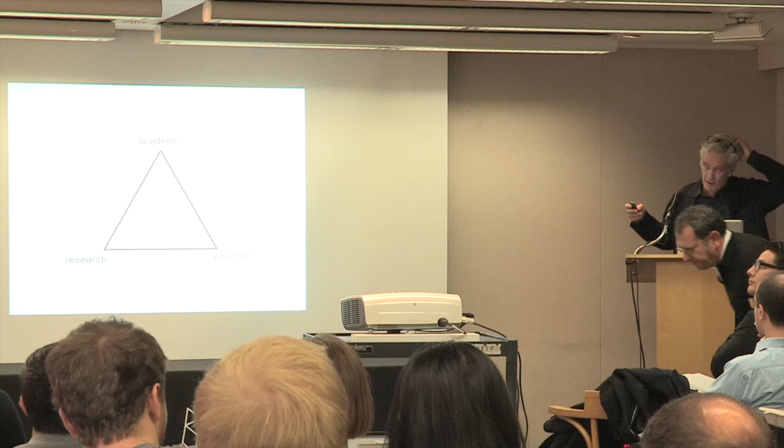I think, like many practices of our generation, working between a research project, an academic project, and the practice itself is fairly common, fairly clear in terms of how these work areas inform each other. This soundbite is really about our time at the GSD, the late 80s, early 90s, with Moneo, and this idea of physicality in architecture—that architecture is really a material practice, and it is the transformation of materials that leads to architectural idea or ideation.

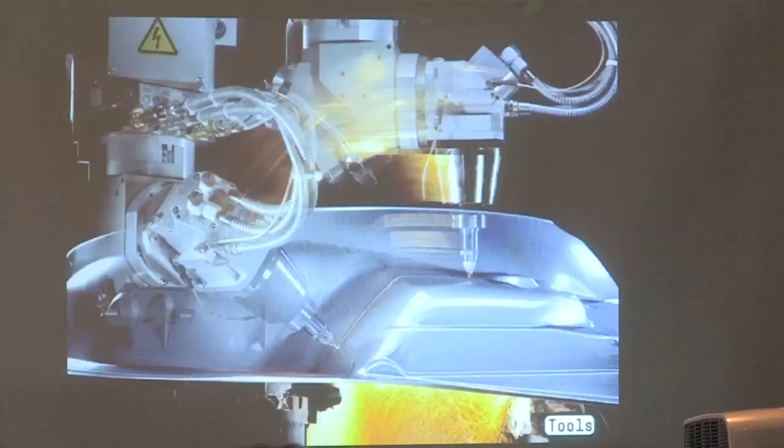So some of the things we've been doing—I'll do a quick forward before I focus on one project in more detail—this idea of tools, both digital and analog, in the practice. What are tools, what are emerging technologies, how can we use them in the practice, and how can that inform the making of architecture.

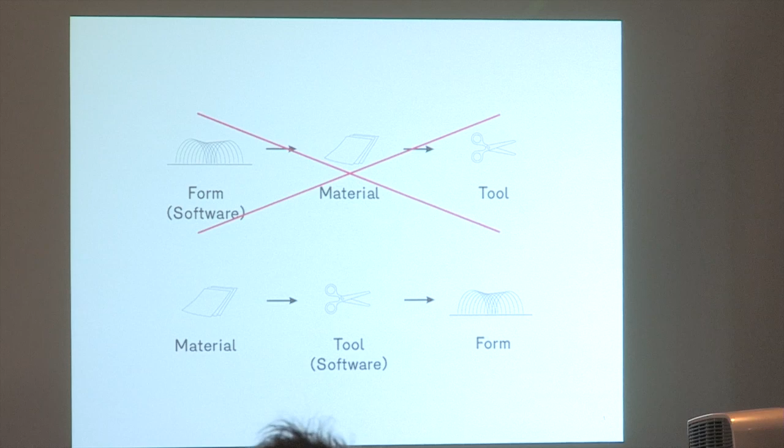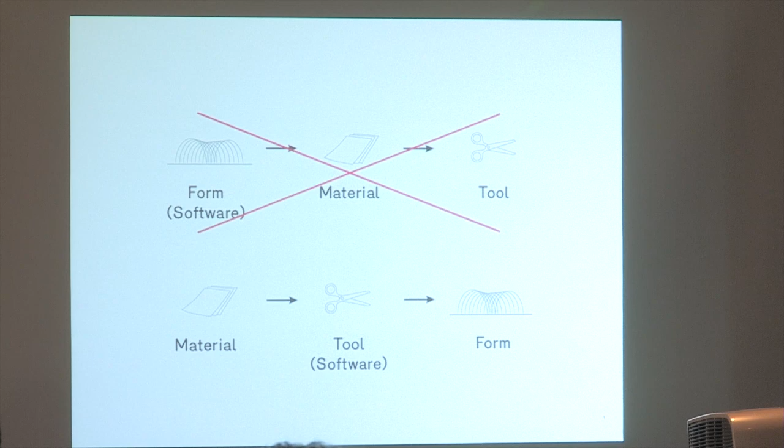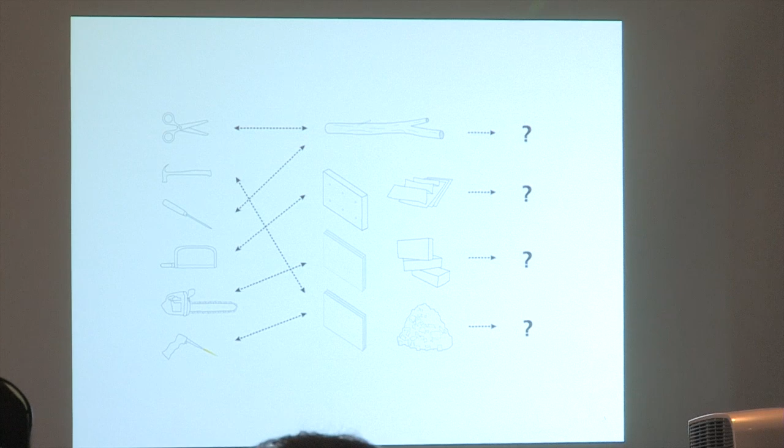When we were students, this was probably the kind of workflow we were contemplating—software was starting to emerge, and it would lead to materials and tooling. More recently, it works like this instead. What's interesting about that approach is that it allows the work to differentiate, allowing toolings and technologies to drive the work forward.

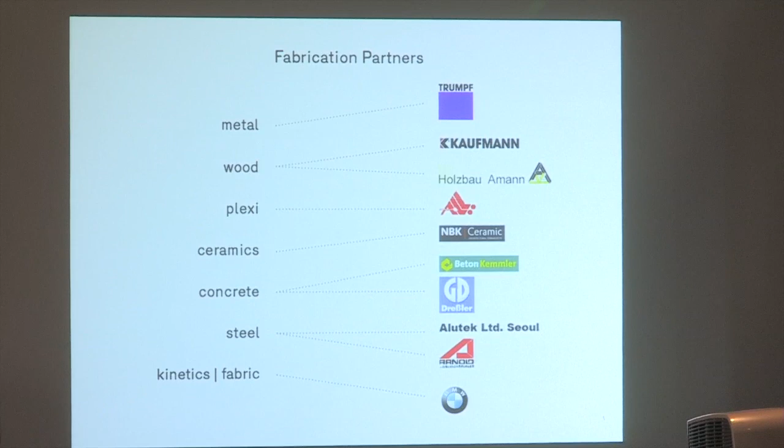This means we're constantly accumulating partners with different skill sets related to materials and their transformation, as a way for us to work with partners, becoming our own best experts in terms of how processes can happen. This also means working with engineers, as we'll be working with Jürg Conzett this week, in an upfront process where we work with engineers at the beginning in a workshop, understanding these things in a more integrated approach where engineering methods and architecture work together.

In order to do this, over the last 5-10 years, we developed this idea of an atlas of fabrication, where we started to produce our own building catalogs—not so much to document buildings per se, but to document processes, typically through activity, through action upon materials, through tooling, as a self-constructed project within the practice that we can add to.

When we initiated the first catalog—and I have a few of these floating around, so I can drop some with the school—it was complemented by an exhibition, first at the AA in London, then later an exhibition in Berlin.

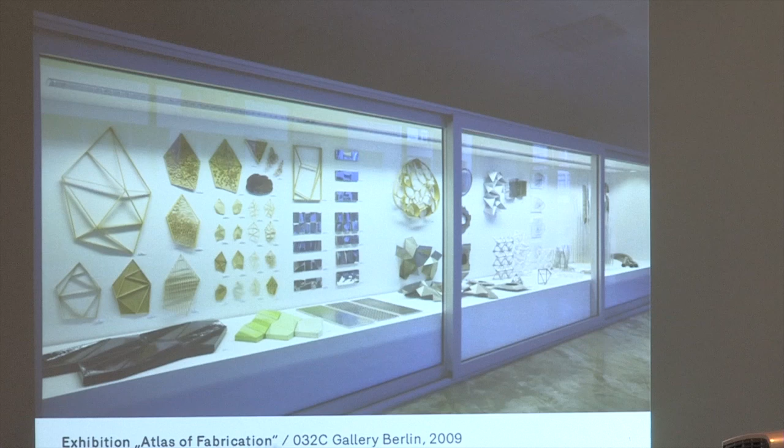This was a way, almost like a natural science museum, or thinking about the idea of an atlas, the way Gerhard Richter would—a kind of series of outtakes or outcuts that are in a not-yet-architecture position, latent to be used or instrumentalized for our building processes.

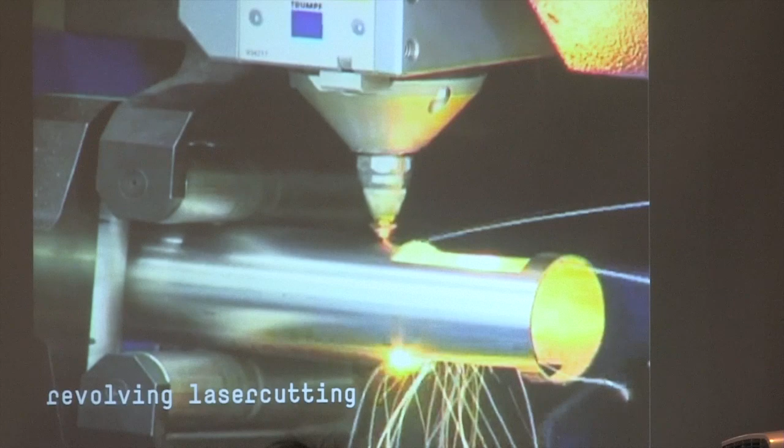At the same time, we began to research and document the capacities of different tools. Working with GSD students, many would go down to the factory sites, look at machines, look at tools, both digital and analog, in a very open-ended, experimental way.

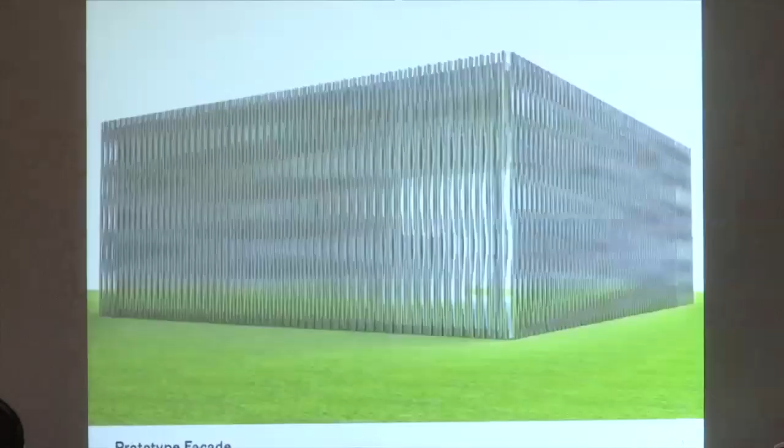In a very compressed timeline, those experiments led to a project at the scale of a prototype and installation, and further development of that idea as a kind of facade that could rotate—for performative ideas like sunscreening, and for the showroom in Sweden, to show the content inside and create an aesthetic effect, as a timeline between these things.

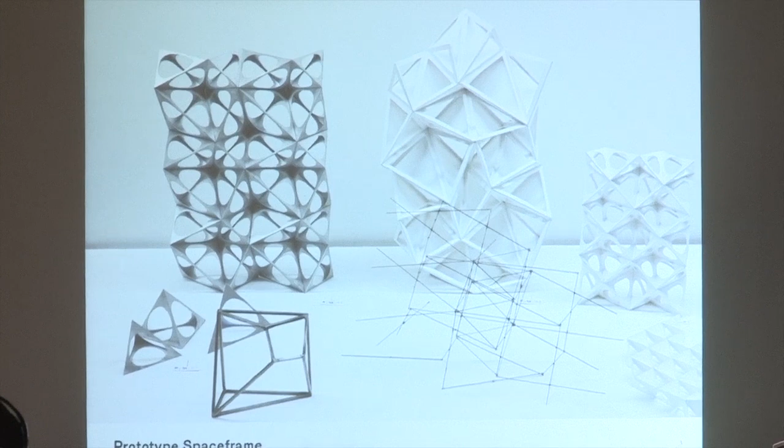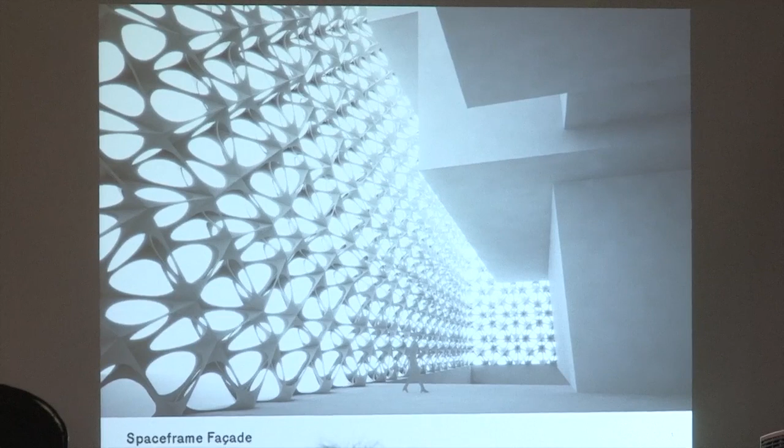Other research areas included space frames—studying those developed in the 60s and 70s, and looking for applications of these architectural elements, in this case as a facade for the Kunstmuseum for the Zurich competition a few years ago, including a studio we did here at the GSD with Chris Bangle, head of design at BMW at the time.

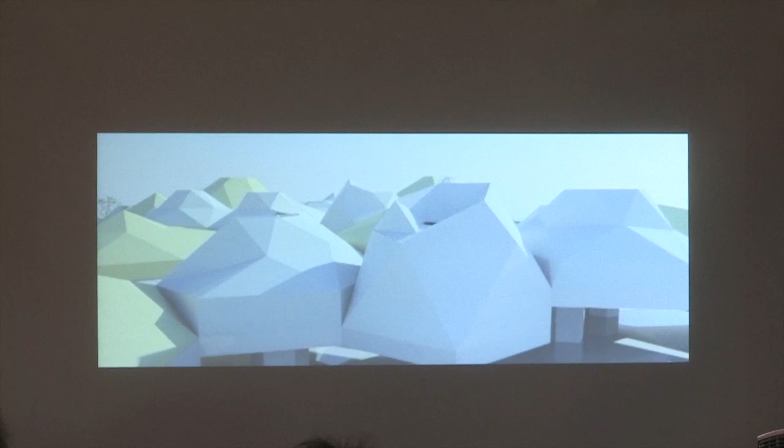This idea of looking at other disciplines, particularly in Germany, which is loaded with technology firms doing different things—in this case looking at Gina, an idea for a kinetic fabric skin for a car that can move and change, and rethinking or rebooting this idea for housing.

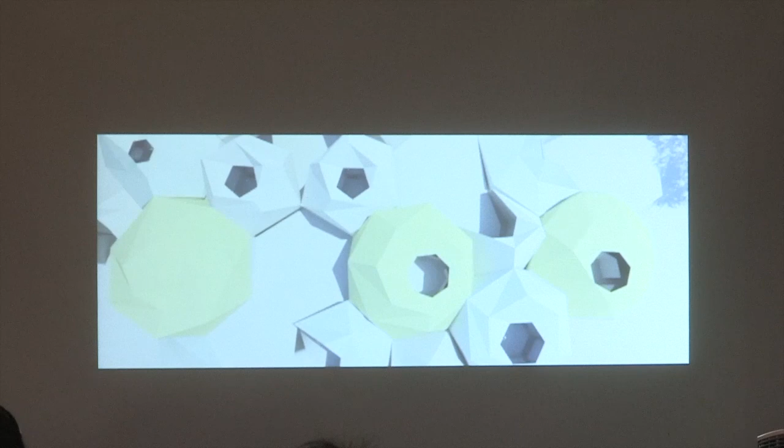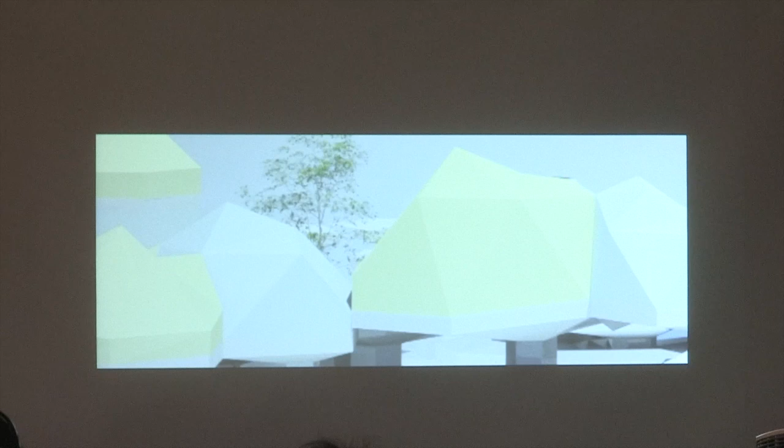This is a project from Nacho Galan for a housing development where the buildings can move, change, respatialize, and reorient to sun orientation—using this technology from the auto industry and revisiting that project at the scale of housing.

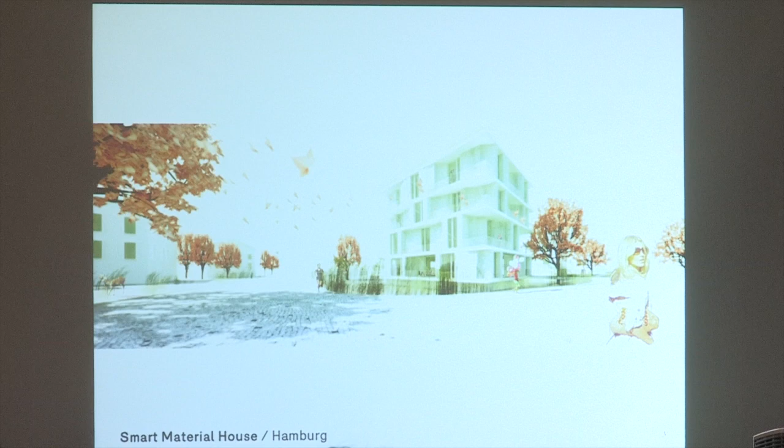Berlin famously had an IBA in the 80s. But the question of this particular IBA was smart materials—what are smart materials today, how could they inform an architectural project, and how could that inform this idea of a project here in Wilhelmsburg.

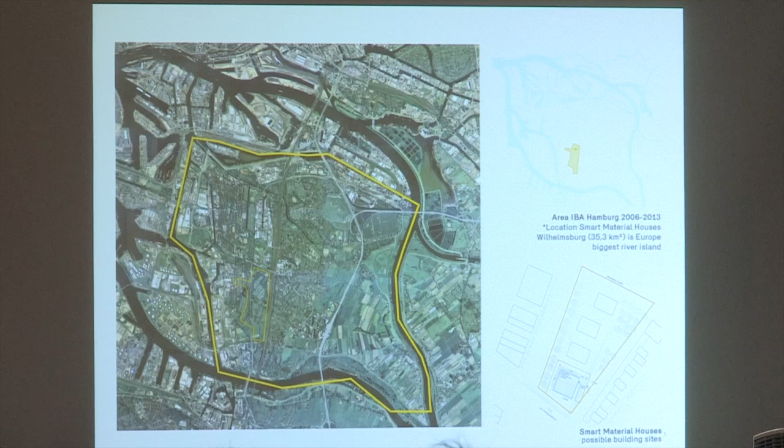This is Hamburg's Hafen City, where the Herzog de Meuron project is. But this is a kind of sketchy industrial part of the city where we were asked to look at a site on the corner to test this idea for about 8 or 10 flats of apartments.

To start this project, we began shopping for materials at the outset to see how that might lead to the building project. We worked with our engineers, including Mike Schlaich, an expert on Infralight concrete, which we ended up using, and Matthias Schuler from Transsolar, who has also been teaching here at the GSD.

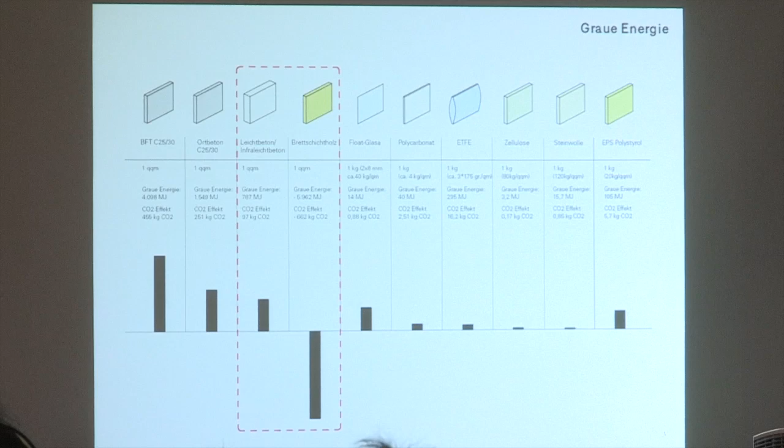Looking at CO2 impact, we ended up selecting two materials that at the outset seemed strange to have together: Infralight concrete, which is self-insulated, combined with timber, which is good in tension for the floor plates.

This material is one-third the weight of regular concrete. It's insulated either with recycled glass or clay, so it's self-insulated—the thicker it is, the better—and it can be combined with timber for the decking of the project.

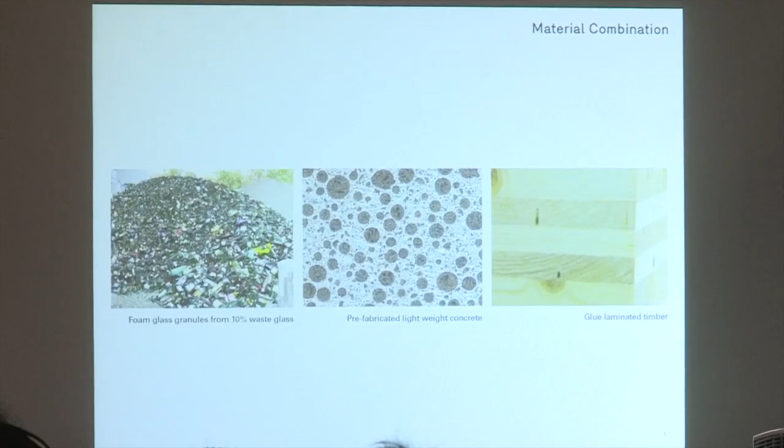At the same time, we were quite curious about the history of prefabricated concrete in places like Germany. This is Khrushchev in 1957, inspecting a model showing the Plattenbau construction, which would work on these kinds of rail lines.

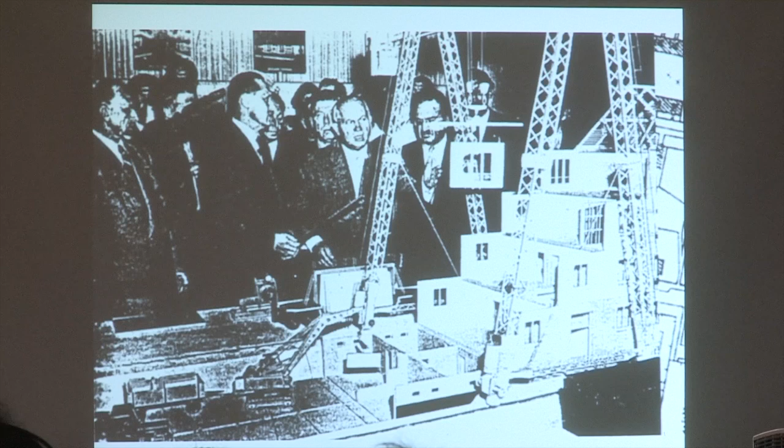The Plattenbau, this plate building, populates entire Eastern European cities and countries as a way of economical, cheap housing. At the same time, it could differentiate. You could have very different sorts of programs and facade systems within this idea, including the idea of arts programs, which were also embedded into the project.

At the same time, this is a conversation with Matthias, about what concrete is and how one could exploit the plastic potential of the material, the idea of shaping a material that's entirely different from others. So some of our first sketch projects were thinking about a smart material, a self-insulated concrete that could pin together to hold a wood construction together. The idea of a wood high-rise in Europe is something not very far away, particularly in countries like Switzerland, Germany, Austria, sketches and projects like this.

This was a project for a kind of box beam space. This is also, I think, a project inspired by some of Jörg's work, where that space can be occupied, it can be programmed, and through this self-stabilizing history of wall making, this box beam could span up to 20, 30, 40 meters.

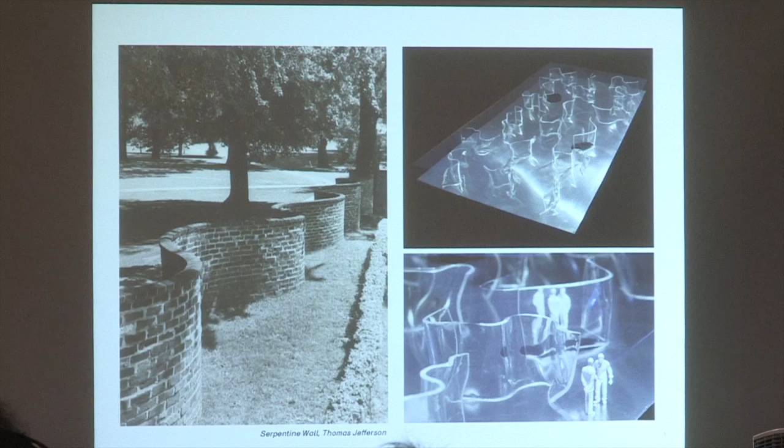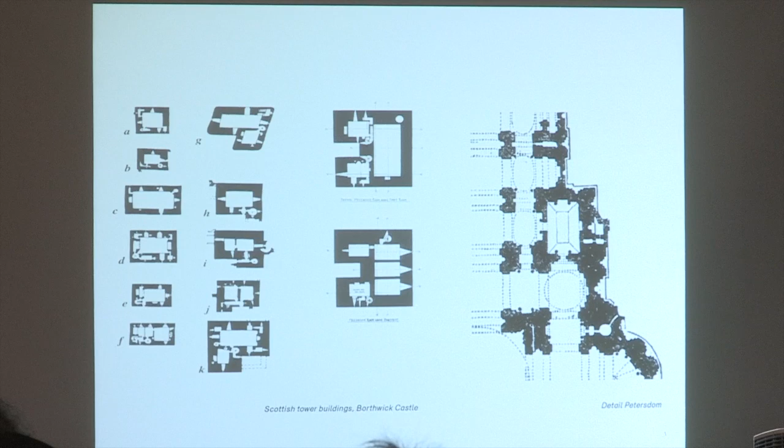At the same time, with this particular material, we returned to the idea of poché. Until recently, high-tech was always about lightness, about steel, about glass, about combining. And here was a material that actually benefited, or profited, through its thickness, through this idea of poché. So in a way, that was also the chance to revisit a kind of historical project.

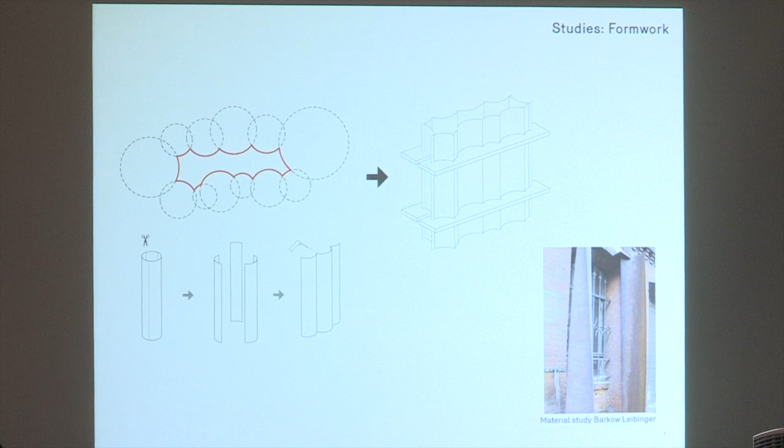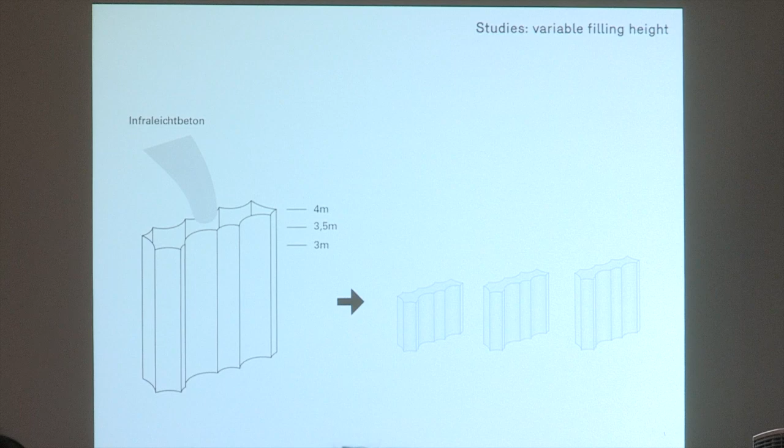Through our earlier fabrication research, we know how to do formwork, so we were pretty confident in terms of doing more complicated formwork. The idea of prefabrication, which usually wants to be about modularization, making the same thing over and over again - we realized we could pour things at different heights. You could take elements, flip them upside down, make a different kind of element, and started to create a kind of form language, almost a kind of alphabet of different building elements which we could combine.

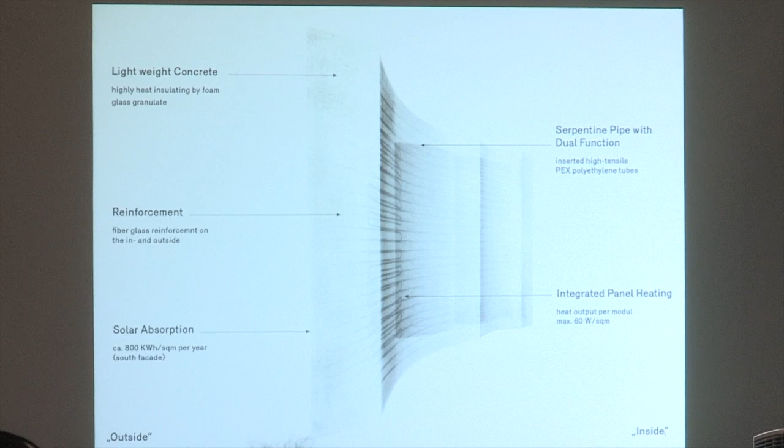In the end, we selected this element, again for a combination of performative potential as well as a kind of formal one. The idea that the shape could be self-stabilizing, self-standing, it wouldn't require any kind of scaffolding to put it up.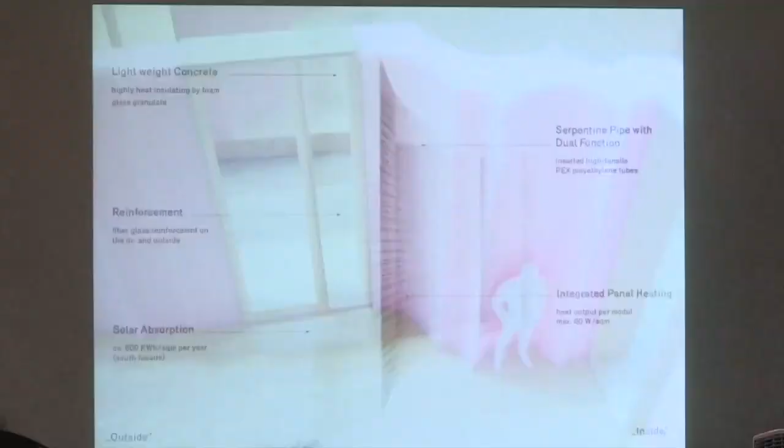All the heating and cooling can be embedded in this element, which is about 60 centimeters thick. It can use mass radiant heating from solar collection, but at the same time have a kind of spatial effect both on the interior and exterior of these spaces, and the scaling of it was important too. So for us it was important, we knew this is going to be a kind of domestic space, so sizing it, combining it with deep wood windows...

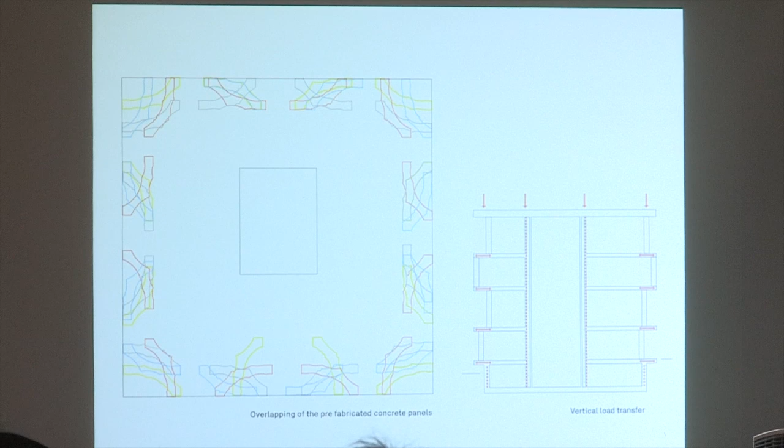...and then started to produce this idea of a stacking, which in a way works like a house of cards. You can stack these elements on, so you see 3 or 4 floors here superimposed over each other. Because both the wood and the concrete are self-insulated, pieces can overlap with each other without causing cold bridges, or warm bridge problems. So again, that was a kind of aspect of the project that could enable this kind of form making.

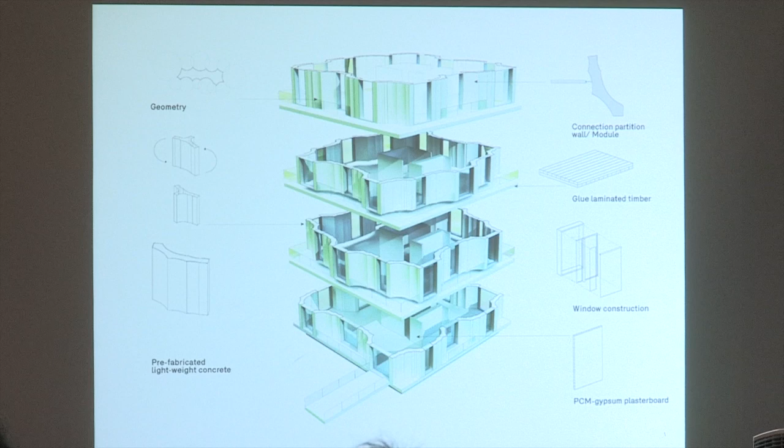At the end of the day, in terms of parts, there's relatively few - I think we had 3 different types of walls, combined with wood windows, which are triple glazed, and then with the addition of an outside acoustical layer, because the site here is quite loud. And then how it's produced was another important factor.

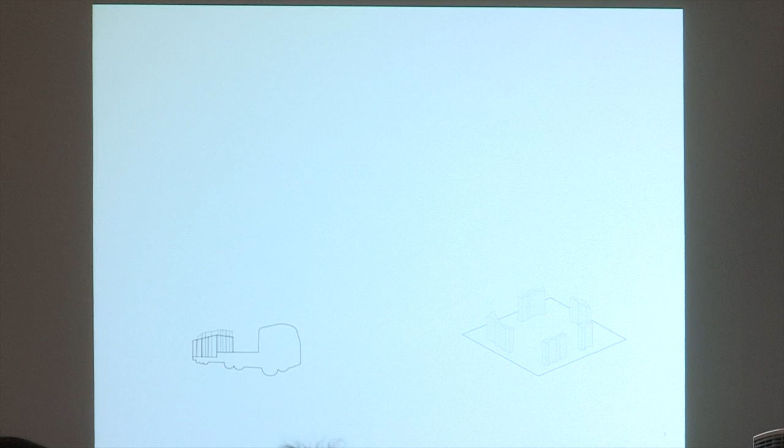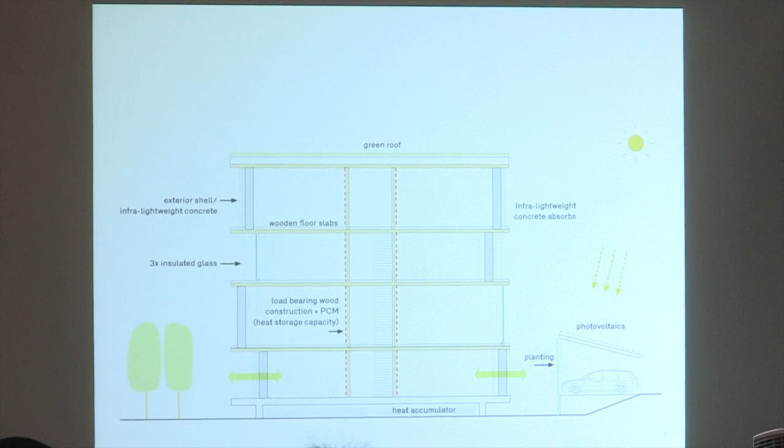So the pieces can be trucked on site, they can all be prefabricated, brought on site so that the entire rough construction can be built in, say, a week or two. So not only what the pieces are, how they work, but how they could actually be collected on site and put together in a very quick way - again, having a fair number of ideas about sustainability, about the engineering of the building, how it would perform on this site, as well as the economics of the project.

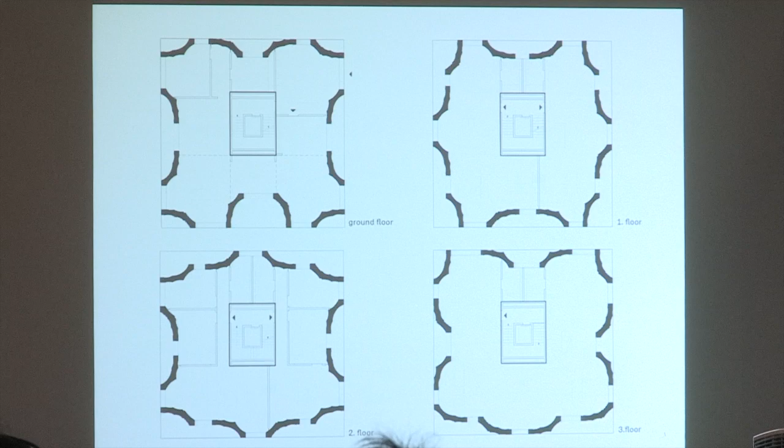So in the plan making, and again because of the capacity of the material, it allowed each plan to be different and to be able to overlap in a kind of nice square grid, where it can either be quite open, like a loft space, or it can be divided into more cellular room making this way, around either a wood core or a concrete core in the building. So in this view of the project, you would see it as a kind of open loft space.

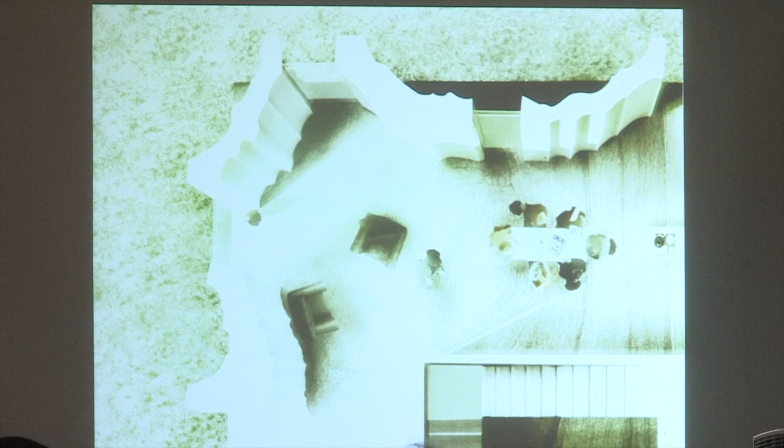The thickness of the walls is a way of conditioning the light, how it comes through the space, in combination with relatively reflective wood decks that frame it, with a concrete floor to help with acoustical separation between the units, and then to create this undulating perimeter, which again has a thickness for letting the light in, which can be given over as a kind of loft space, 3 or 4 meters high, or divided into more traditional rooms.

For us to understand the project, we started making large-scale models in the shop at our practice, which is where we do most of the design. We wanted to build it as close as possible to the real thing, so we made it out of this kind of ugly pink foam that you could stack over each other.

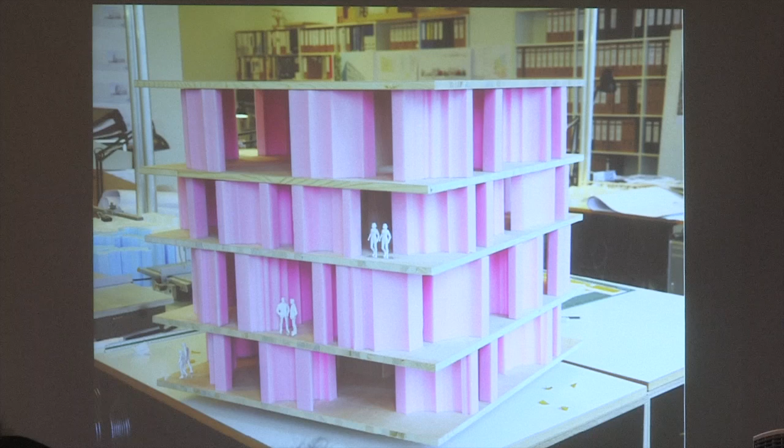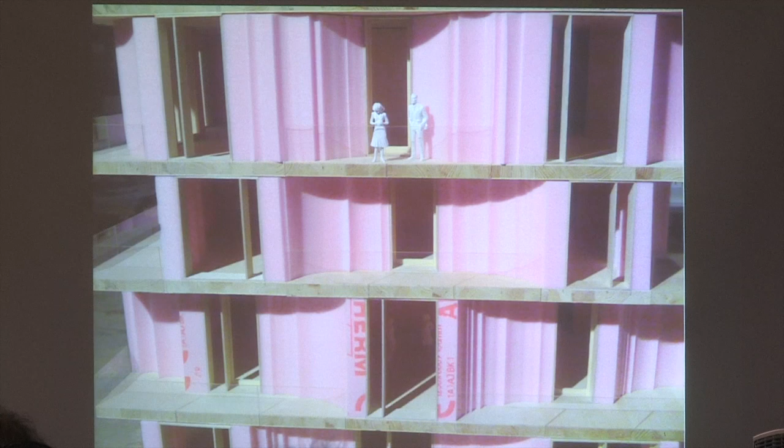By building these modules, which we could build quite quickly, we could see clearly how the structure would work. We could see clearly how the spatial depth would work in the project from the exterior, where it makes these kind of balconies, as well as the interior, so that the project had this dynamic 3-dimensionality, and a kind of reversibility, where the front and back of the pieces condition either an interior or an exterior.

Again, we had about 3 types. You could flip the types, the elements upside down and produce another one, or you could pour them at different heights as you needed, in a fairly flexible way.

By the time we had won the competition for the IBA, we submitted this for a prize for the Holcim Foundation for Sustainable Construction, for a Global Innovation Prize, and they gave us enough money to build an actual prototype of one of the walls.

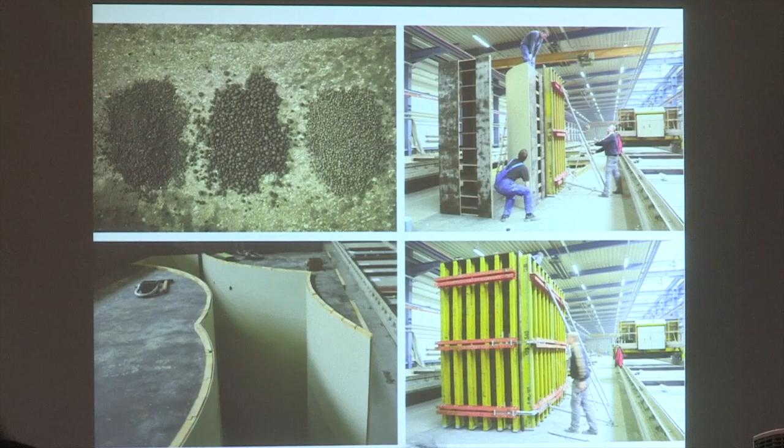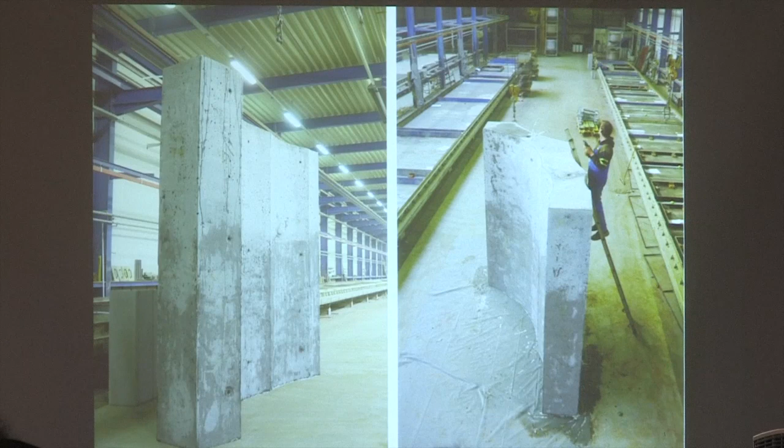This is the clay aggregate, and then this was the formwork that we ended up producing with CNC technologies, and then produced these one-to-one elements, which this week we're testing in terms of finish, in terms of polished finishing or sandblasted finishes, and how we could use these further.

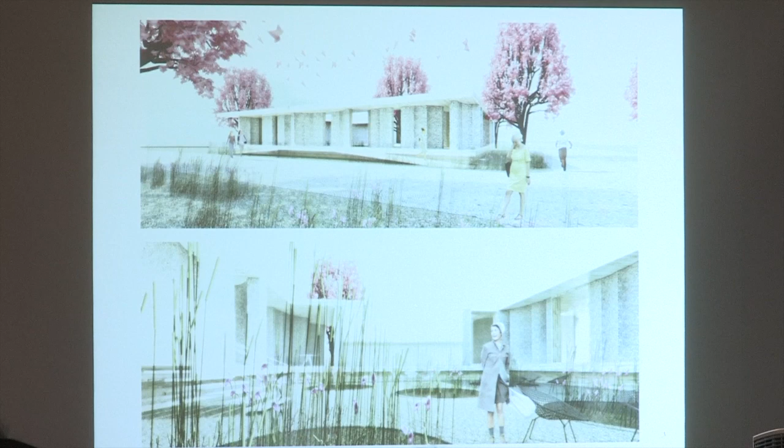At the same time, the idea of it being a prototype was important, which meant it could adapt to different kinds of programs. In this case, this is for Hamburg also, a pavilion project where it now becomes a one-level project with a courtyard as a kind of circular route through the project.

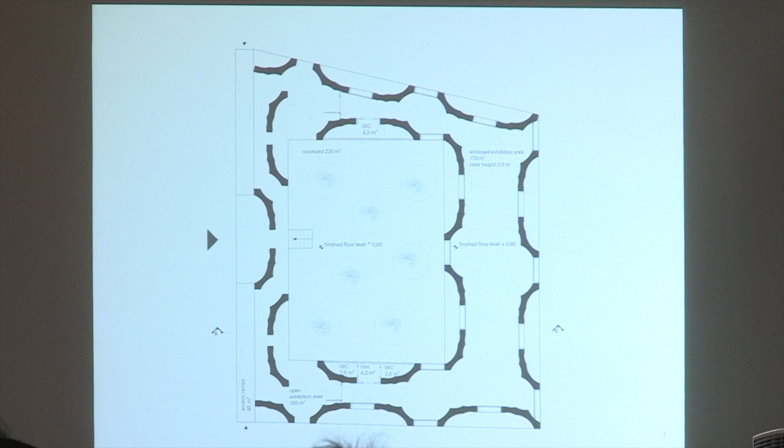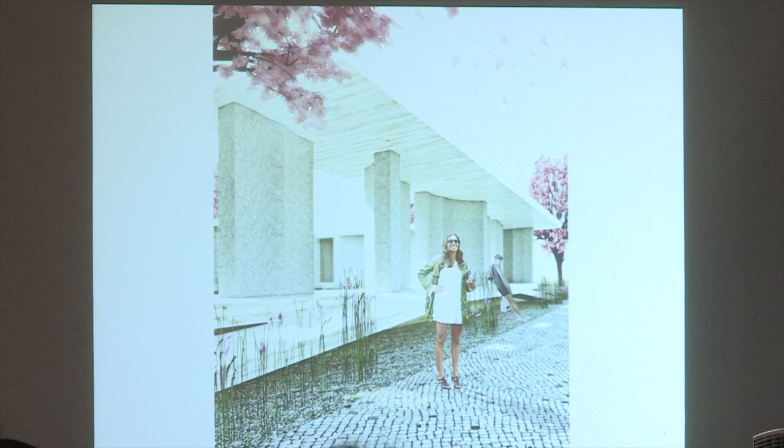For us, it was also interesting to understand the limits of the construction system in terms of typology. It could be for housing, or we could use it also for a kind of exhibition space, as a prototype.

In the latest iteration of the project, we are now focusing on the Karl Marx Allee in Berlin for the urban living project, which is in a way an even better way of situating the project in context—again, if you go back to the Khrushchev image—in the context of prefabricated Plattenbau context, and looking at different sites within the Karl Marx Allee where this particular project could be located.

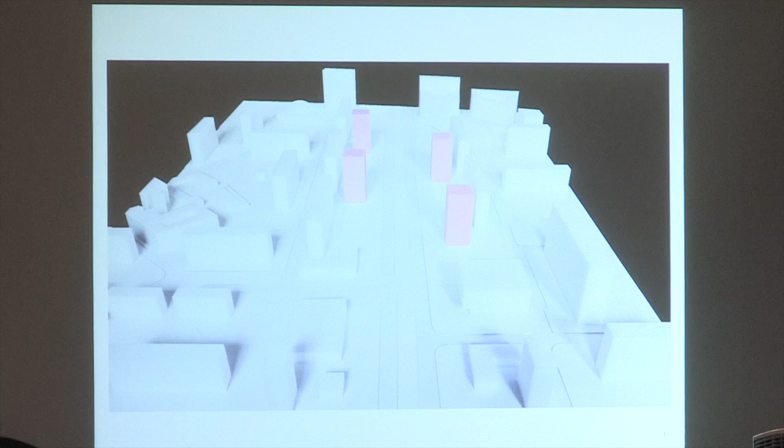So these, and again, this is from like a week ago, so this is hot off the press. But looking at towers now located within the context of, and for us in a much more urban context, of the project in the Karl Marx Allee.

How am I doing for time? Yeah, very good—you have 5, oh, 5 or 10 minutes, okay, okay.

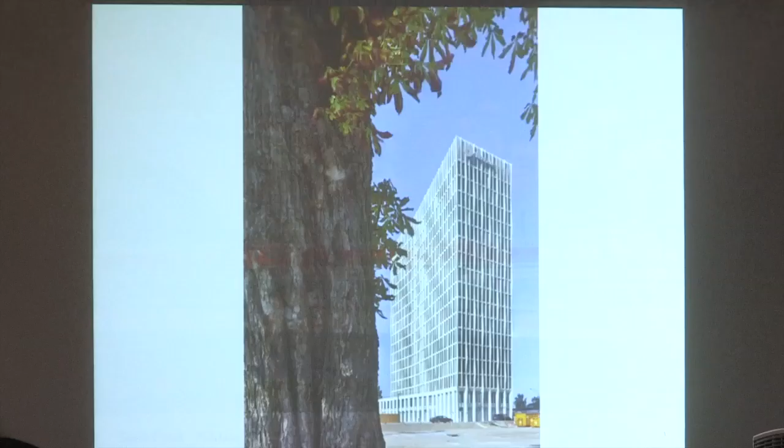Not very good, I was going to show this in more detail to the students, but this is a project we just finished, Tour Total, in Berlin.

This is related to the other project in terms of precast concrete for a facade that in a way belongs to the history of Berlin facade making, a raster facade or a kind of gridded facade. I guess here you might call it a Chicago frame, which in this case is a kind of exoskeleton. The facade is connected back to the floor slabs through a number of isolated or insulated connections. It was important for us to have a facade, unlike the curtain wall history maybe here, that had a kind of spatial depth to it.

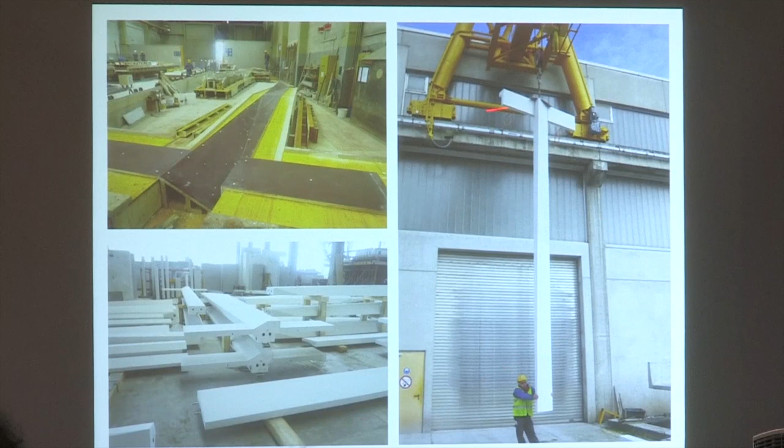It has exterior sun screening, which is also the same idea as the sustainability idea. Through the closed surfaces it produces better insulated surfaces, and then using again our techniques and technology for the production of the precast elements that were made off-site in Frankfurt. They're extremely precise, in a white concrete with a kind of acid wash to them.

Again, the digital realm means that we could produce 160, 170 different types for this one particular building. Of course, some of them repeat, but we could produce a huge variety of pieces that could come together and assemble to make this building.

So at the point where a kind of independent facade and exoskeleton, in a sense, can be connected back to the floor slabs, for us to be both a kind of historical quotation for Berlin, at the same time innovative in terms of technology, and in the last sense, produce a certain amount of aesthetic effect that we were looking for.

So I think that's the last slide I have, actually. But this was this idea of what we're doing with concrete right now, in terms of one focus area that I hope is helpful. I'll go into this in more detail, Eric, later in the week with your students, in terms of the idea of envelopes and facades. But I think in the context of this talk, I wanted to really focus on one particular project.

Thank you, Frank. Thank you for this wonderful short talk. And as many of you know, now we have three people responding. One is faculty, which is Eric, Eric Höweler. You all know him.